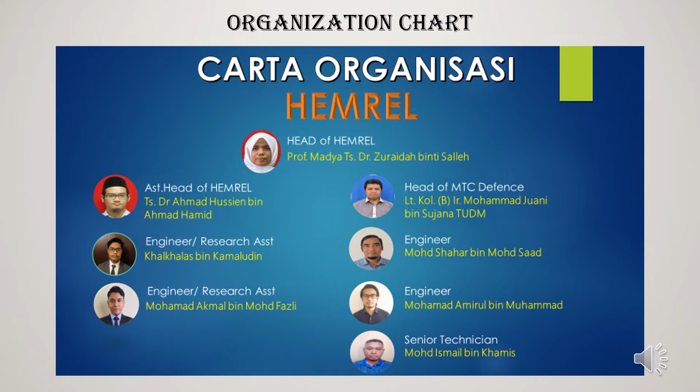This slide shows the organization chart of HEMREL. The head of HEMREL is Prof. Madya TS Dr. Zuraidah binti Salleh. Meanwhile, head of MTC Defence is Lieutenant Colonel Tuan Mohammad Juani.

The purpose of the industrial training is to expose students to the real work environment and gain knowledge through hands-on observation and job education. The exposure to the industrial environment will trigger students to apply the theoretical knowledge learned in lectures and improve their practical skills. And this will motivate students to practice the right working attitude and professionalism to increase the employability potential.

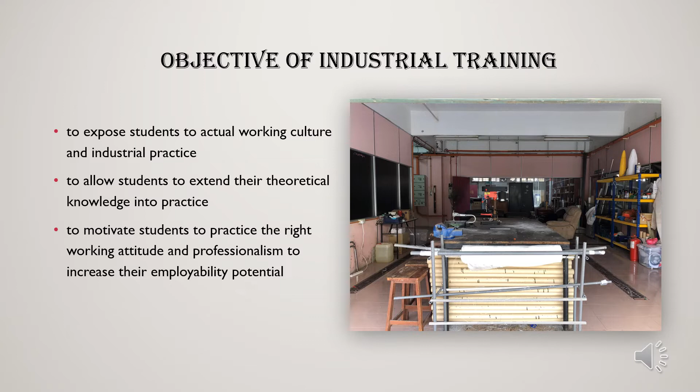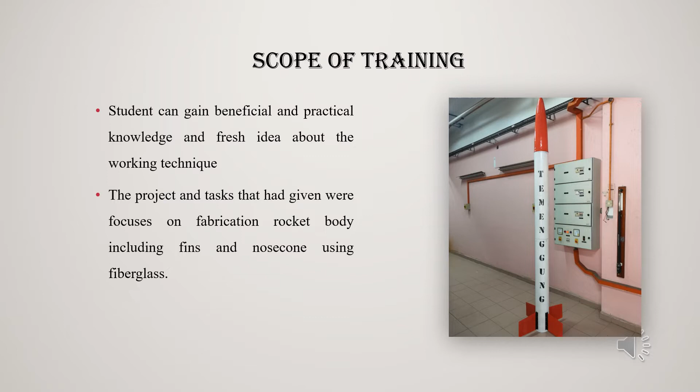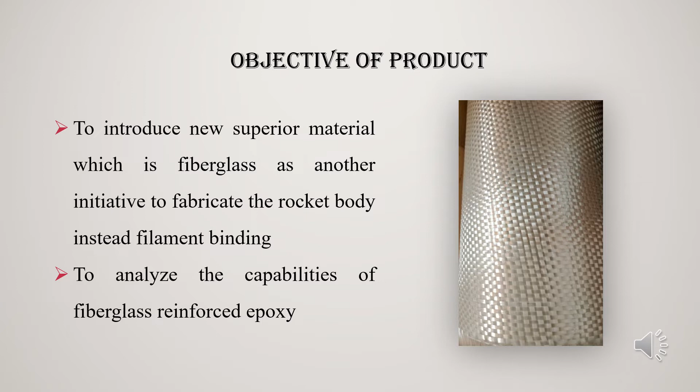For the scope of training, students can gain beneficial and practical knowledge and fresh ideas about the working technique. And the project and tasks given focus on fabrication of the rocket body including fins and nose cone using fiberglass. The objective of the product is to introduce a new superior material, which is fiberglass, as another initiative to fabricate the rocket body instead of filament winding, and to analyze the capabilities of fiberglass reinforced epoxy.

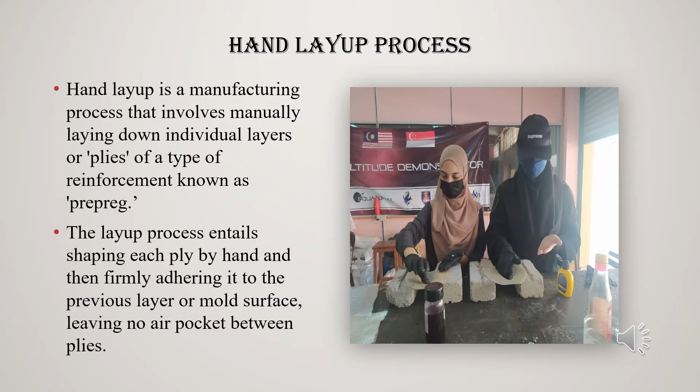For this project, the hand layup process had been used. Hand layup is a manufacturing process that involves manually laying down individual layers or plies of a type of reinforcement known as prepreg. The layup process entails shaping each ply by hand and then firmly adhering it to the previous layer or mold surface, leaving no air pocket between plies.

We proceed to the process of fiberglass fins. First and foremost, the fiberglass was cut following the mold size, which is 21 cm and 25 cm. The epoxy A and epoxy B were weighed, which is 150 gram A and 45 gram B according to the 100:30 ratio, and both epoxies were mixed. Before putting the mixed epoxy, the plastic and mold were waxed first to prevent epoxy attaching to the mold and make it easy to remove the mold after the hand layup process dries.

After it dried, the first layer of fiberglass was put on the mold, the epoxy was spread and the bubbles discharged. Then another layer of epoxy was spread and layers of glass cloth were put layer by layer until it reached the desired thickness, which is 4 mm. After that, the mold was put under hydraulic press for 24 hours.

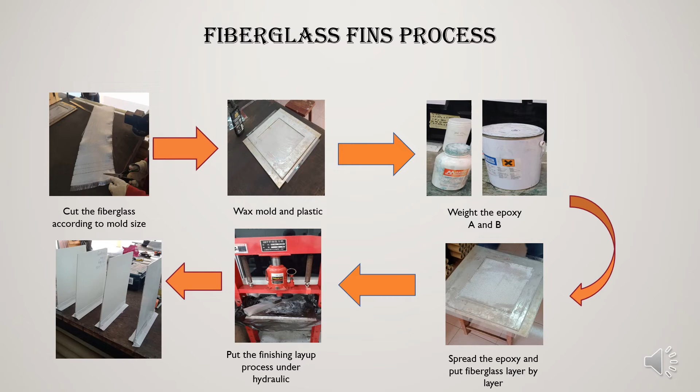Before we make the fiberglass nose cone, we must make the mold first. For the first step, the board was cut according to the size of the nose cone prototype, then followed by fitting the nose cone into half of the parting board. After that, the gap between board and nose cone prototype was filled with clay. The wax and PVA release agent were put on the board and prototype nose cone. This PVA is a traditional mold release agent and can be wiped on or sprayed onto a wide range of pattern and mold surfaces to provide a very compatible and reliable release barrier for epoxy composite.

Next, the fiberglass was cut into 4 pieces and the first layer of fiberglass was put on top of the nose cone prototype and board. After that, epoxy was spread carefully and bubbles were removed. The half nose cone was left for 24 hours. After 24 hours, the half mold was taken out from the board. The adhesive on the mold was cleaned using paper. Another half of the nose cone was made following the similar method and left for 24 hours.

The mold of the nose cone was drilled to make holes for the screw installation on both sides of the mold. The wax and PVA were put all over the mold. The 4 pieces of fiberglass were put layer by layer according to the mold shape with epoxy. The nose cone was dried for 24 hours. The excess fiberglass around the edge of the nose cone mold was trimmed.

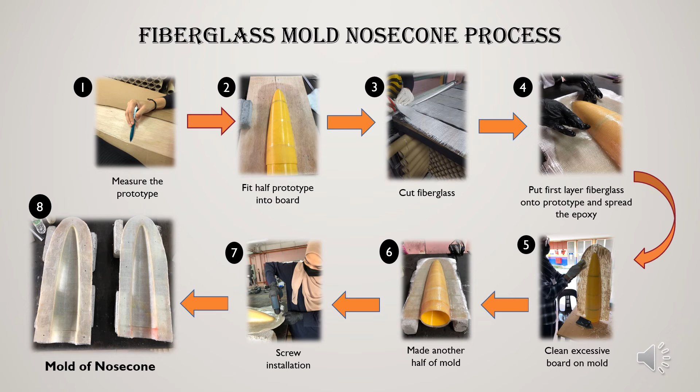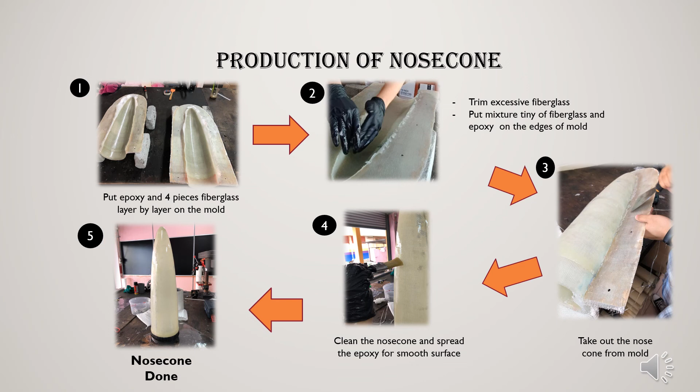The tiny mixture of epoxy and fiberglass was put on the edge of the mold. Then both sides of the nose cone were attached together and clamped for 24 hours. After 24 hours, the nose cone was taken out from the mold and cleaned using sandpaper. The epoxy was applied on the nose cone using a brush for smooth finishing. The nose cone was done.

The impact that I get from industrial training is teamwork, communication skills, and new skills. In this process, the trainee should work in a team to complete the product. This teamwork will help the trainee communicate well with the team, and this will improve communication skills among the students. Due to PKP, I only learned about the hand layup process by watching YouTube. Hence, during this industrial training, I got the opportunity to gain new skills in the hand layup process.

For the conclusion, students are exposed to the real working environment, which is an efficient method in producing a well-rounded graduate. The environment in industry is different compared to studying in the university. The variety of jobs helps give students a wider perspective of the reality of working in the industry.